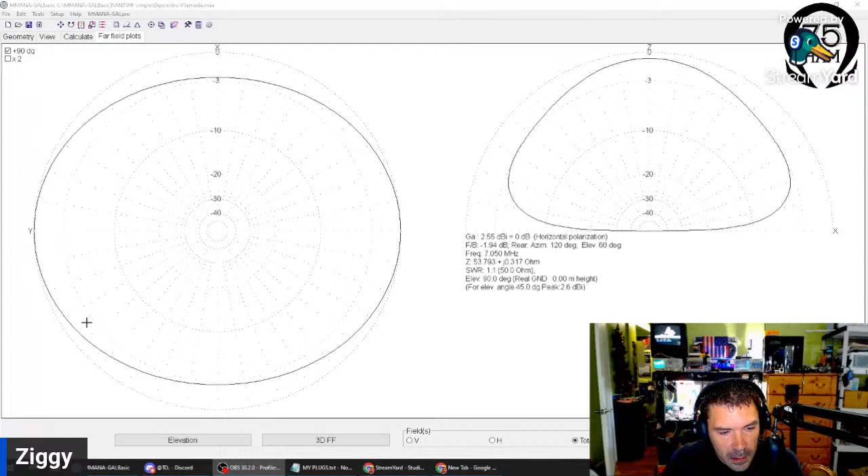So I was kind of playing around with this. I need to be able to look at you guys too. I can move this over here. Come on, give it to me. It won't let me drag it to the other window.

Good thing nobody's watching, right? StreamYard, why won't you go to the other window? That's so strange. Okay, the things I do for you guys. Beautiful. My modeling software.

Let's go new. Let's do some wire edits. Let's draw a wire, right? New wire. Actually, can't even do that. That's why. Let's go grid.

Up with the cows, milking the public. Oh, isn't that great? Hey, Hollywood, let's see.

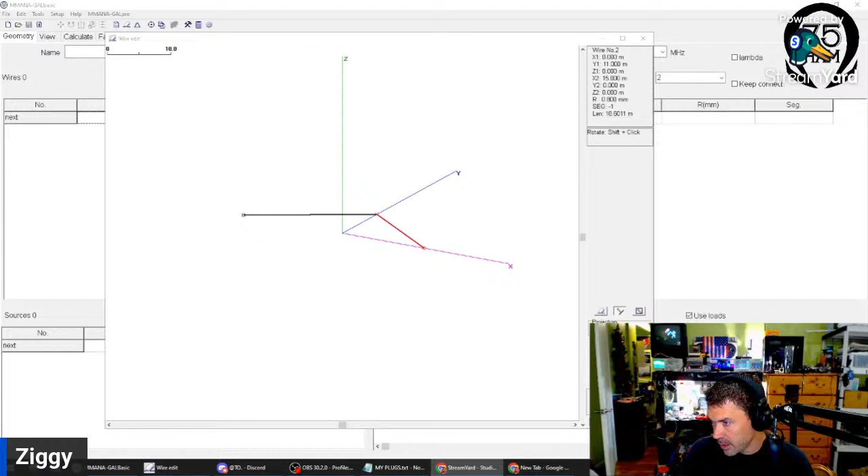Hollywood. Let's see, not able to really move this around. Shift click, rotate, shift click. Yeah, my antenna is laying on the ground, it would appear. Unless, no, Z's up.

So let's try this again. Is that not? Zero. Meters. About—hey, that looks great.

Not a problem. All right, in 3D. Son of a bitch, is it? No, okay, shift click, shift click. All right, hey, looks like an inverted V.

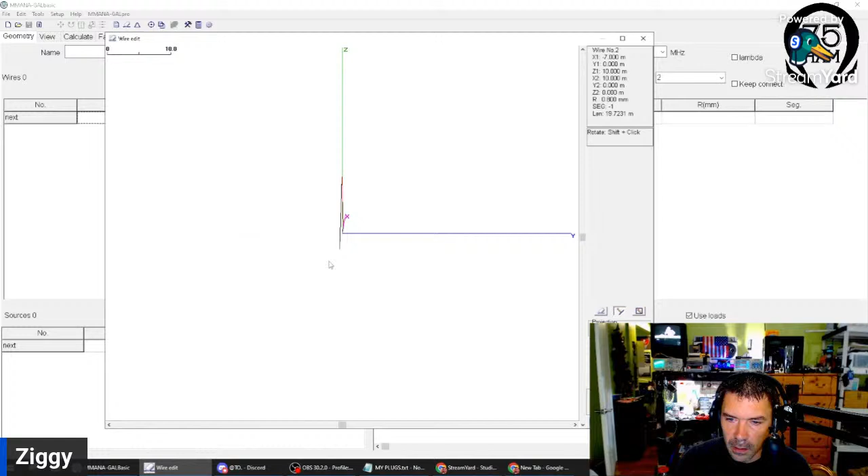Now the radials—the radials are going to be in a different plane. So this was XZ. My radial plane is going to be on the XY plane, like this.

So how do I tell it? And what were my radials? I have that written down. They were 18.5 meter... 18.5 feet, to, if it gave me millimeters I could still convert it to meters. It's 5.64. Let's go 5.64 meters.

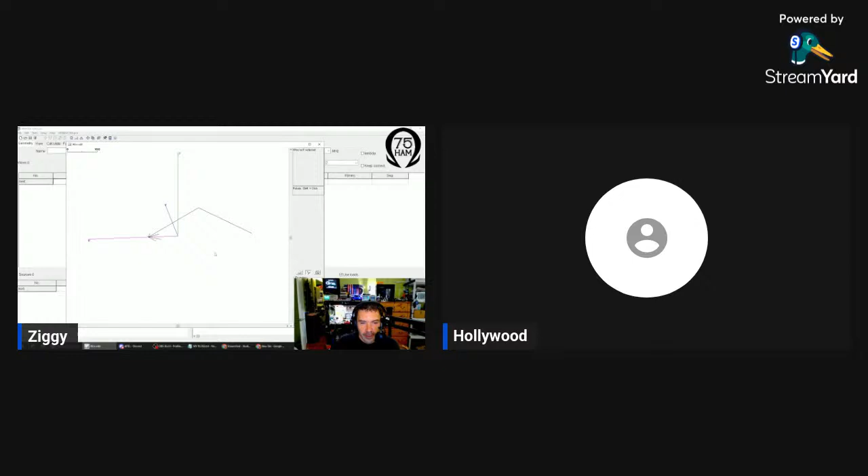There we go, and then we don't need this ugly mug in here either. Let's get rid of—well, you can't see my ugly mug, so I know it doesn't apply to me. It does not apply to you. Where is Logic Cam? There we go.

All right, and this is—no, I'm sorry, go ahead. Oh, it looks like an end-fed half wave. It does, it does. The thing about it is that somewhere around the end of this wire, the magic happens, because this is actually 2 parallel wires and one is cut 5 feet shorter than the other right here.

Oh, okay, so the drawing doesn't have the 2 in parallel yet. And no, it does not. Okay, yeah, got it.

But connected to the back of a tuner with just a little bit of radials, like this is about how it was deployed. Okay, yeah, pretty sure my modeling software is not going to let me draw a truck with a PVC mast under here for accuracy. So we've got two end-fed half waves, one a little longer than the other, right, in parallel, fed by, what, the same transformer? No transformer, right out the back of a tuner. Okay, yeah, okay.

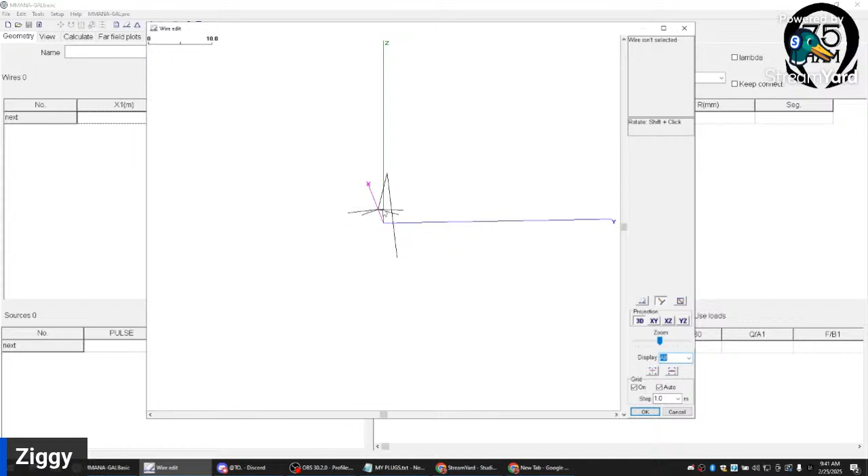So now, 2 parallel wires with spacing, obviously. I think I know why, but I'll ask for the general public: why 2 parallel wires? I wanted to give the RF a choice and something to push against, to maybe create a third realm out of the 2 different lengths, so the possibility for matching would increase by giving it just slightly different lengths on those 2 wires. It could jump between them, use them both in a favorable way.

I don't know, but I'll tell you, it's probably the easiest thing I've ever tuned in my life. It was so apparent — normally you've got to seek real hard to find it, but this thing had multiple tuning spots. Awesome. And if you didn't find one, you weren't trying. Right, right. So that's why it's got my eye. Very good idea, yeah.

So I'd love to model it. I kind of have an idea of what it's going to do, but — back in the day, let me just throw this out — Radio Shack used to sell a shortwave antenna, a dipole, and it was made from rotor cable. It was 5 wires in the flat ribbon rotor cable, so it technically was a fanned dipole.

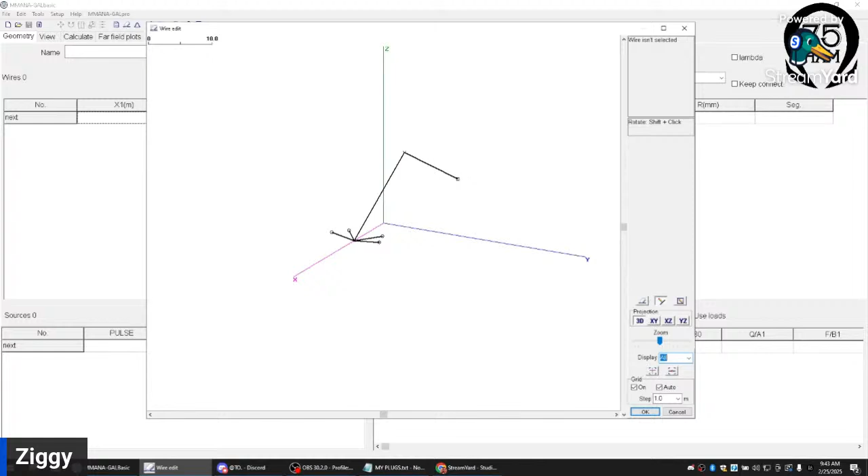So this parallel line, I'm afraid it's going to be a lot more complicated than I want it to be, because now we're talking about wire thickness and wire spacing. And I'm not quite sure that we need to do such a thing, because they are so close, they're going to have some kind of awesome coupling between them. Yes, yeah.

But I wanted to see if I was doing much of anything with the 2 different lengths running parallel as they were. But you said they didn't actually fan the ribbon cable, did they? No, oh wow, no, it was all in this — you didn't peel it apart — so they're just 5 parallel wires on either side, it's just the ribbon cable. Yeah, so yes, there is capacitance and interaction and all of that.

But electrons are lazy. That's a good one — they are, and they take it like water. Water is also equally lazy. It's a very good analogy, and it takes the easiest path always. They're always trying to go from point A to point B, and if you look at a river — look at the Grand Canyon — it will cut through rock to get to the other side, wherever it's going. And if it finds something in the way, it will bend around it. And electrons kind of do the same.

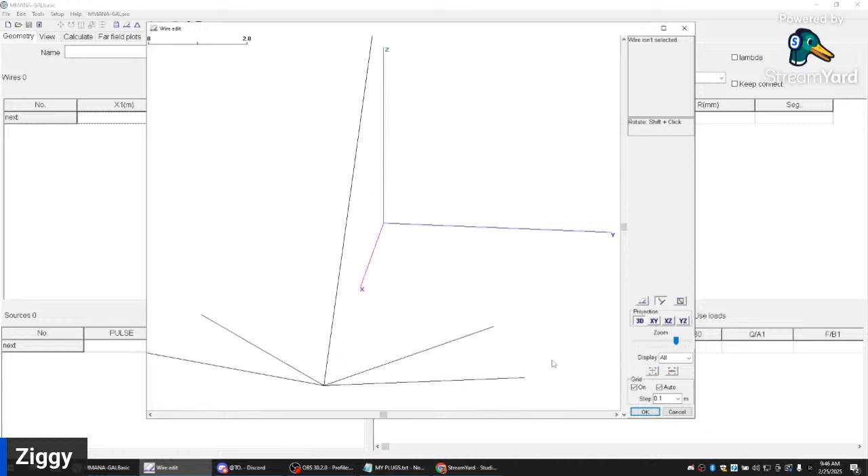They don't generally jump off the end of the wire unless you get enough of them there, and then they start pushing and shoving and calling each other names, and then they have to jump because there's no room for them. Tensions get heated — that's the spark you see at the top of the Tesla coil. Yeah, there's just no room for them, they have to leap, to their own demise. I gotta go. Yeah, yep.

So I drew all these at the same point here. I guess my MMANA-GAL thinks that I have this 5-wire device here. I want to tell my MMANA-GAL that these are not part of the initial radiating element. Did you connect?

So you want to make sure you put your feed point on this wire solely. Yes, right. Got it. Whatever number that is. So feed is somewhere else. Where?

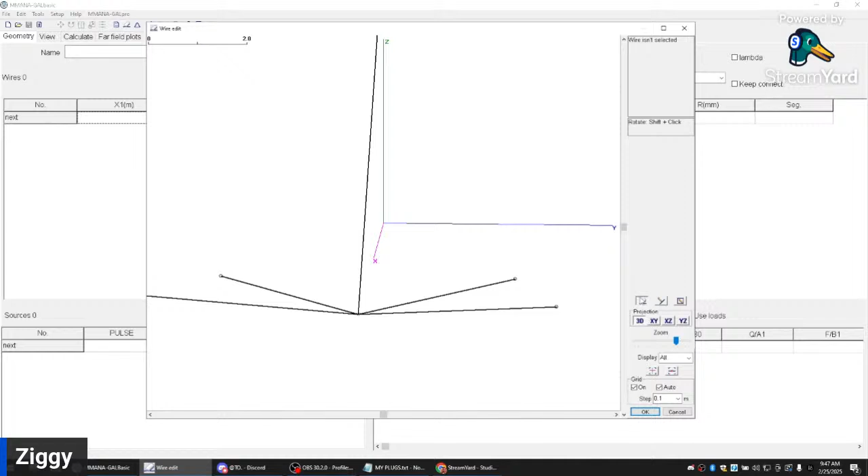I am in wire edit. I should be able to not erase. How do I select? Above 3D, click on the icon right there. Yep, that will select it. And now take the mouse and click on that wire. There he is. Right, so that's wire number 2.

And depending on which direction you drew it, one end is the beginning and the other end is the end. We're looking at the beginning. So when you're done editing the wire, you go to the geometry tab in the upper left and select wire number 2 beginning.

So in the bottom left here under sources. Nope, bottom left. Yeah, the pulse. Click in the pulse. It's going to be W for wire, 2, B for beginning, and then hit the enter key.

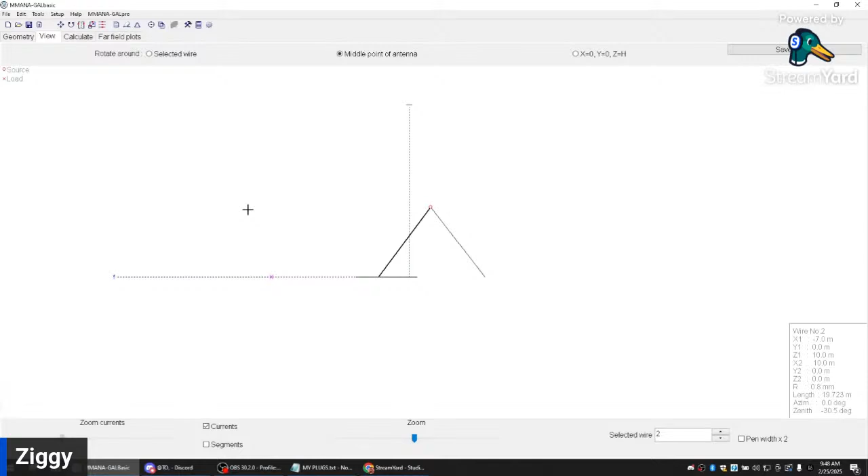And now go back to view, and you should have a red circle there. Oh no, zoom in, my red circle went to... So you drew actually 2 wires. Okay, so that's okay, so that will be wire 2 end, that is the correct position.

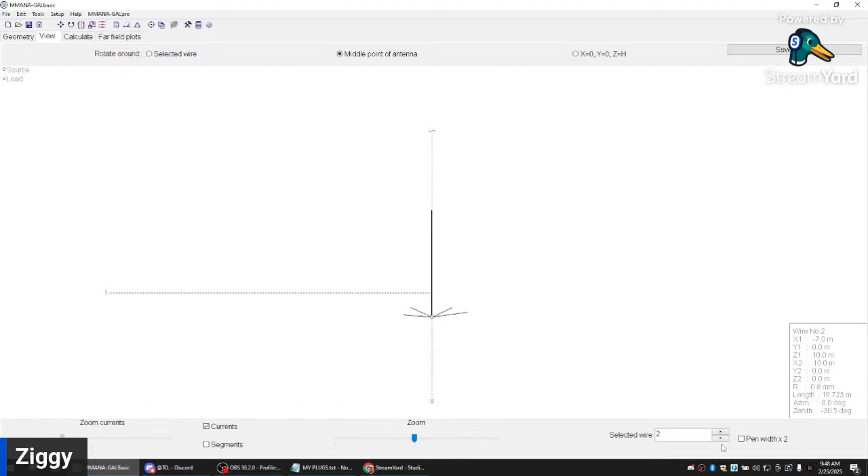There it is. Perfect. It's often very difficult for people when we start out to see it in 3D in their mind and then know where the points are. It's kind of clunky, but once you get the hang of it, it does make sense.

So these 4 little wires that I drew here for my quote radial field, are they assumed to be on the other side of the feed? Yeah, the other side of the feed. Because what happens is on this software, the red dot is sort of like a balanced input. It doesn't differentiate between which side is hot and which side is cold.

It's probably a good idea to not think of it that way, even if you're feeding an antenna with coax, because both sides actually do move. Just a slight click less than the other. It doesn't move at the transmitter end, but it does move at the far end. That's a big concept to ingest when you're a young ham too, and it's 10 o'clock in the morning and people are going, what? Oh boy, he's starting already on us.

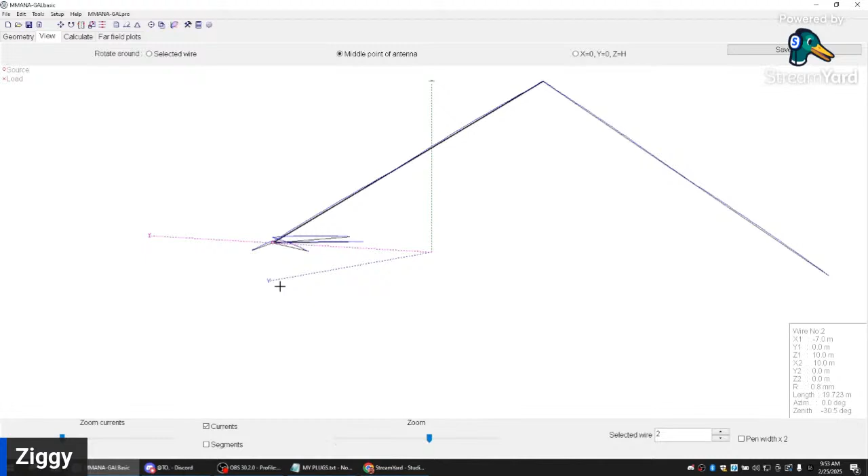It's hard to get a view of the currents. Go on the bottom left where it says zoom currents, slide that thing over to the right. Oh, you can make them exponential. Oh, how wonderful, there you go. I've always wanted to know how to take it from... come on, turn it up. Where do you get my bill? By the minute, I'm sure.

Okay, so those radials are doing some work, let me tell you. Which is fine, because this scenario is we are sitting on a table out in some grass with a battery, our radio, and a tuner. So we are kind of free to experiment with radiating radials, in my opinion, as long as we're not bonded to Earth or anything.

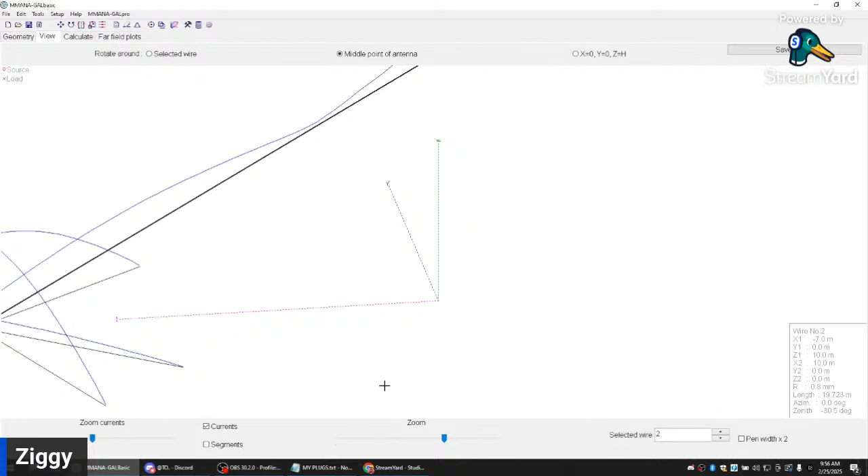Right there is a high point, and then not quite a half wave at the feed point. So it's got current at the feed point, it's not going to be a high voltage point. Remember Ohm's law: if it's high voltage, it's high impedance. So this is not a high impedance feed where we are right now. So if I made the wire a little bit longer, then I would put the voltage at that red dot. If I made it a little shorter, I would have more current at the red dot -- a lower impedance antenna. So I can change the resistance value, the Z, of the antenna by making it shorter or longer.

Right. But you always start from the far end. I think that's what I'm trying to say -- it's morning and my brain's not working right. But that's basically what I'm trying to say: work from the far end to you, because the far end never changes.

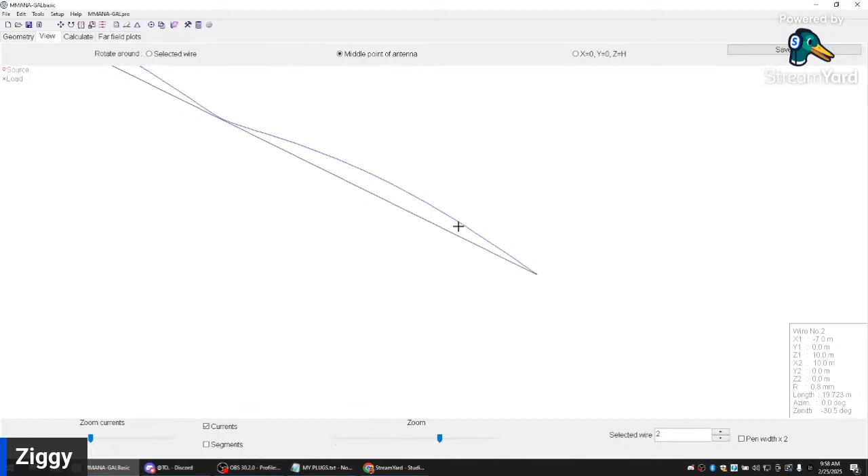Now, there's going to be skeptics, and they're going to say, well yeah, but what if the wire is stuck in a tree? It'll change. What if the tree is wet? What if it's raining out? What if there's snow on the wire? But in real simple terms, because we're starting out, the far end is always high voltage, no current, and measure back to you from there. It'll help you conceptualize what's going on. And this is a great picture when you look at the currents -- this says everything that you need to know.

Like I can see that your radials are a quarter wave, or close to it. They're set up correctly, you're absolutely spot on.

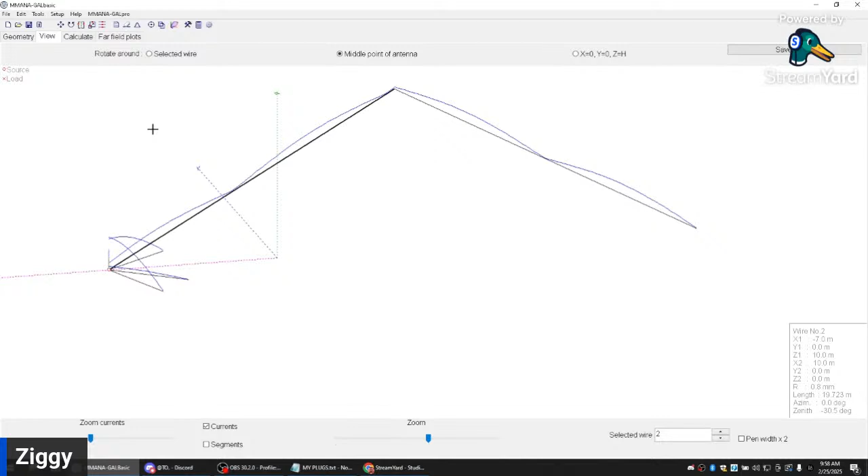This is why I'm so interested by this thing, because there was not a single measurement done here. This was all what I had. I don't even think I cut anything, I just had this stuff and made a radial field with 4 equal lengths. They are 18.5 feet long each, and when I deploy them, they are completely insulated from the ground.

That's something I've recently learned to never do again, is give my RF a path to sink into ground. That's a whole topic by itself. So they're completely floating, and then my radio, my transmitter, and most importantly my tuner are all left afloat. I have no ground into the earth, bonding my tuner into earth or anything. So this is a completely floating setup, in my opinion a perfect portable setup.

And the tuner is doing all of the work. This is in no way supposed to be a resonant antenna.

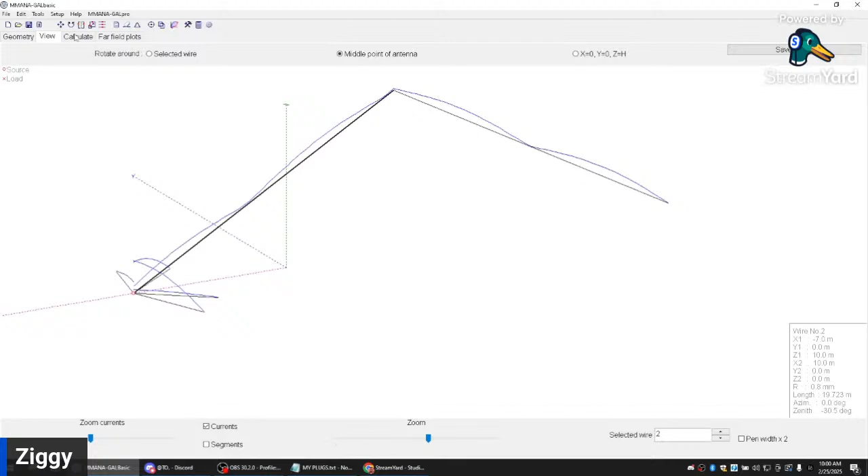This is a long antenna, 60 feet, oh yeah, what I've got right now. Oh, it's longer than that. Oh yeah, we were supposed to fix this. You okay? Now you're showing it at 80 meters. I didn't see what frequency you were on before. I was on whatever was there by default. I believe it was 14.1, you were on 20. Yeah.

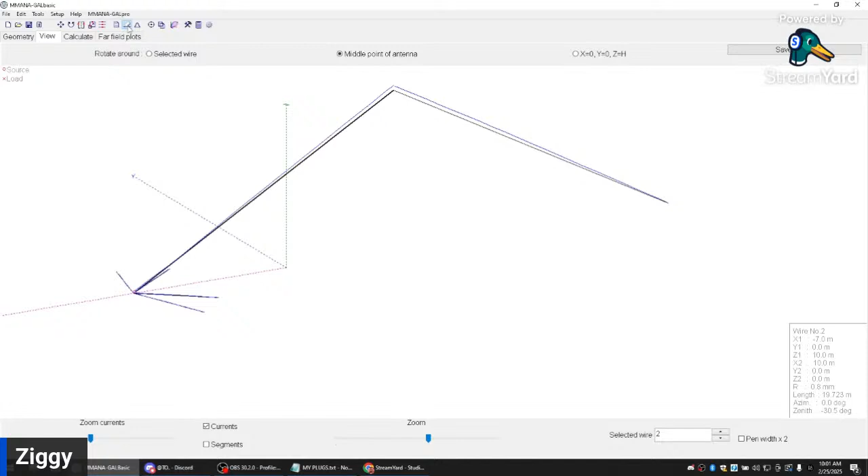Anyway, I need to fix this thing. Can I just edit it here? They will not be connected if I edit it here, they will separate. Yeah, that's a tough way to do it, you can do it that way. Let's do it the smart way, let's delete and redraw. Work smarter, not harder. What do you want to do, shorten the wire, start over completely? What do you want to do?

I think the radials need to be modified because they're showing 5 meters, they're actually 5.6 meters. Okay, you can just stretch them. Just click on it and pull it to the right.

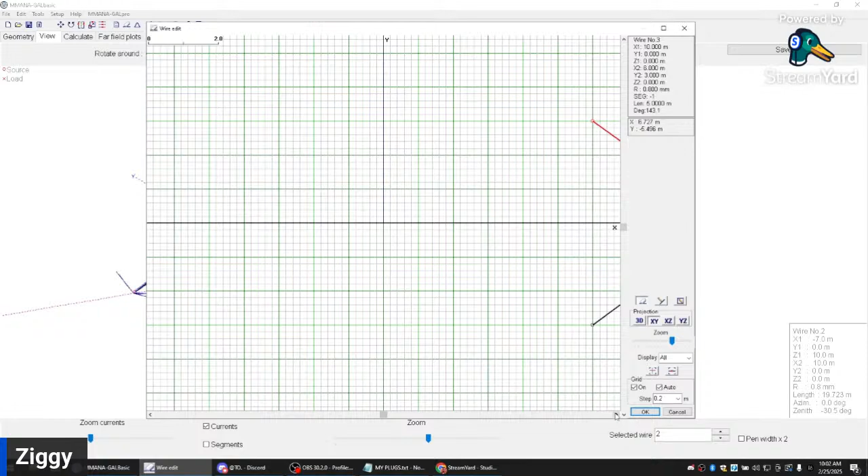Let me zoom out, one of those views will show you. Yeah, so it kept snapping me, because it snaps to the nearest green line. So if you zoom in tighter, it'll give you more precision, it's too coarse is what it is. And you can move the image. If you go down to the bottom, you can slide the whole image to the left by moving that square at the very bottom to the right.

Oh okay, now it's letting me do my own thing here. So the length is 5.6. Sure, come on, oh, to each square, that's where it's snapping. Yeah, that's correct, the junction of each green line. Let's just get it close because this is in no way an exact science. That's right, 5.6, give me this.

Now the bad news is, I have to be somewhere in an hour, and I'm far from ready. Well, you're going to have to get ready. I'm going to be in and out.

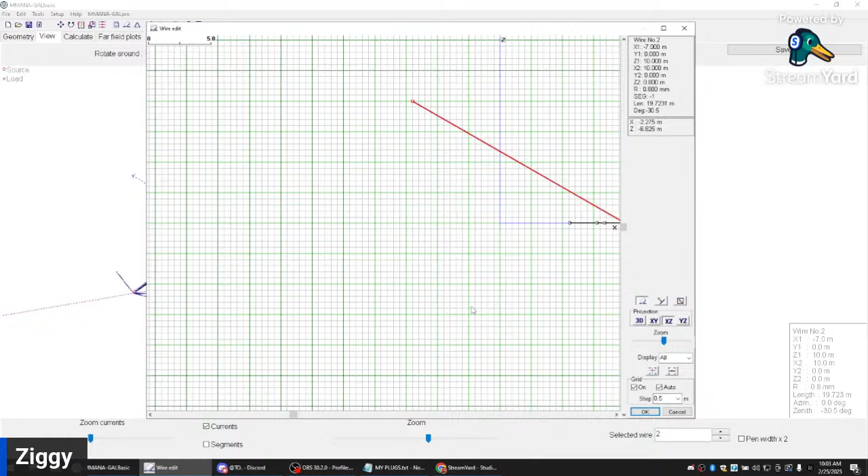So what I'm going to do is mute the mic and come back, and if you're still on I'll check in, turn up the mic gain and say hello, see what you're doing. But you're off to a good start. All right, I will keep the momentum. Magnificent, yeah, and I think we're going to chuck this wire and redraw this one, or change its length. Yeah. Cool. All right, Hollywood, thanks for letting me jump in. No, thanks for showing up, it's all fun, I'll be here struggling when you need me.

Okay, all right brother, I'll check in a little bit. Okay, all right man, bye. Adios, see ya.

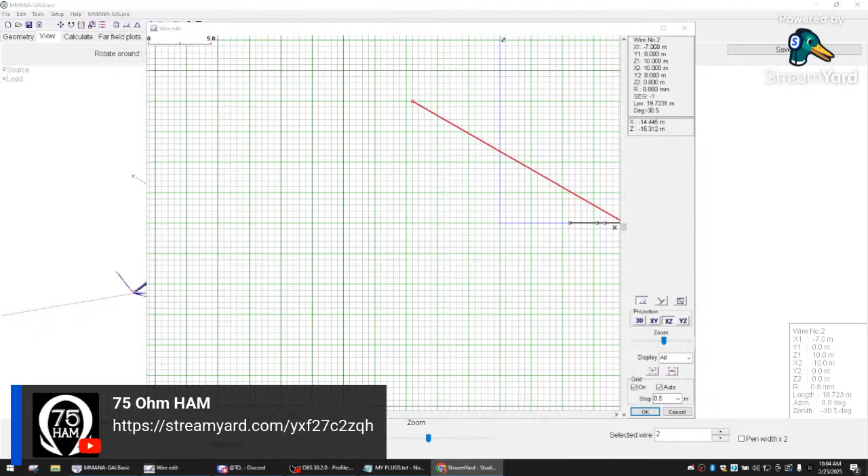Let's see, let's go back to you guys. All right, perfect. Hey Paul, hey guys. Why don't you guys jump in here if you're not doing anything? Let's see, I'll repost this link for you guys. I gotta find it.

Oh, and there's Josh, hey good morning Josh. Ziggy, let's do a video of you teaching me how to use this program sometime. Oh, teaching you, we can play with it together, I'm good at messing it up and modifying stuff.

Let's see, what was I doing? I gotta pick up the kids today, it's early release day.

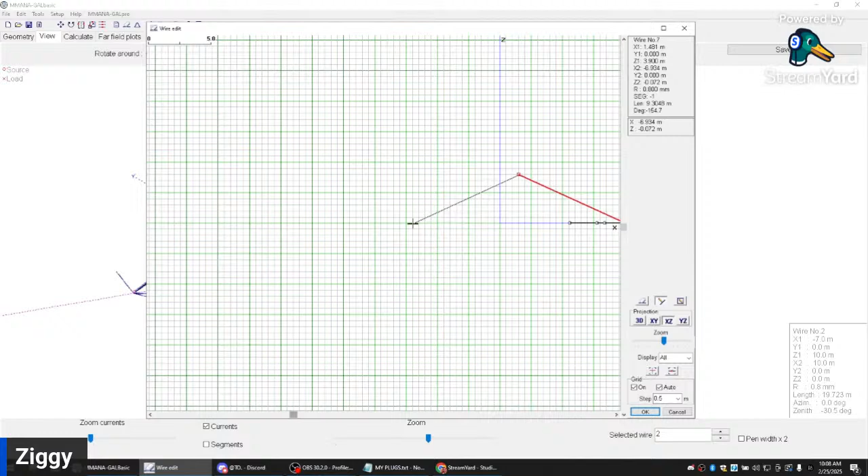Let's see, all right, so that was the first wire. We are going to draw another wire, and it's going to be, what was it? 9.3 meters, right? 9.3 meters. Boop, yeah, I dig it. All right, let's do that.

Oh, that's a much better representation.

Oh, okay, I just soldered 2 of the KB4PHC kits together. But did they work? That's right, I remember hearing that you had a couple of these kits. Only flashed one, but it works. Hey, success.

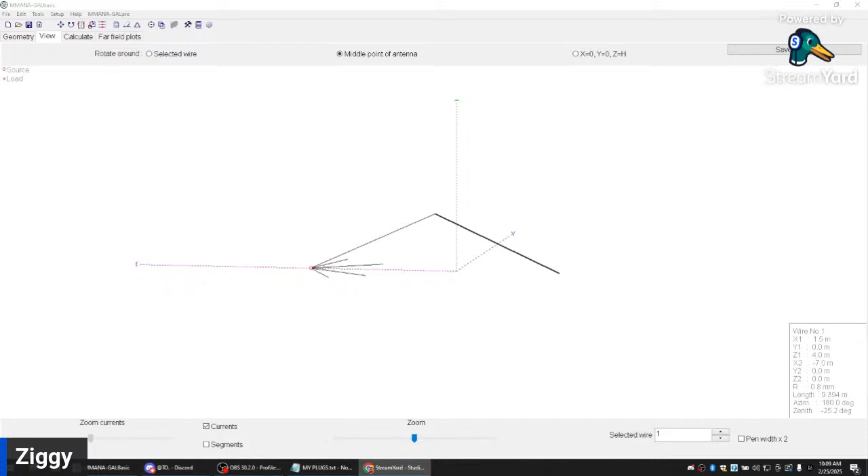Let's run this, we're at 14.1, we're a meter off the ground. Run it, that didn't take long at all. Far field, whoa, look at this thing! What on earth? What a monster, okay, I need to see where the hell is.

Okay, so here's the radio side.

John says he's got to worry. Sorry, man. Well, don't worry too hard.

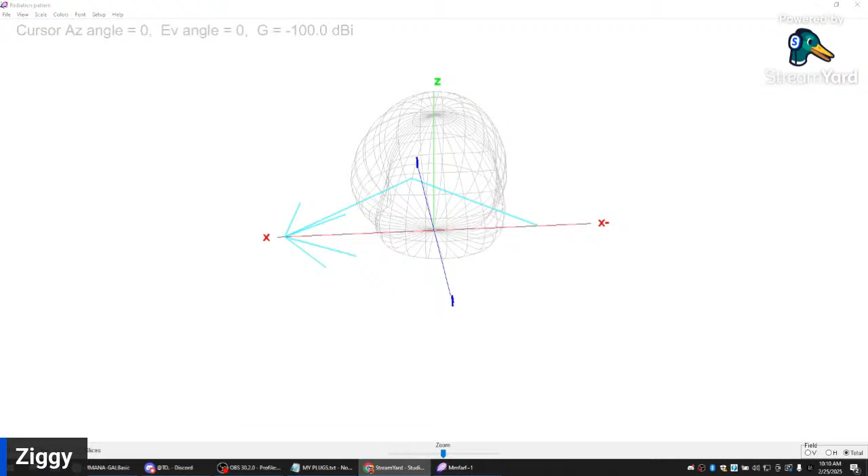Do you want to go outside, Daisy Doo? Come here Daisy, Daisy, show everybody you gotta go potty. Come here, come on. Look at this face, oh it's your daisies. Says I gotta pee, come on, I'll take you out, come on. You gotta get off Daisy. God. Excuse me guys, let me take care of my dog, I'll be like 30 seconds. Come on, let's go.

Now I gotta reset. Let's see, shit happens better when it's outside.

All right, so let's go back to this. And I want to see you guys at the same time. There you are. So here is the radio, right?

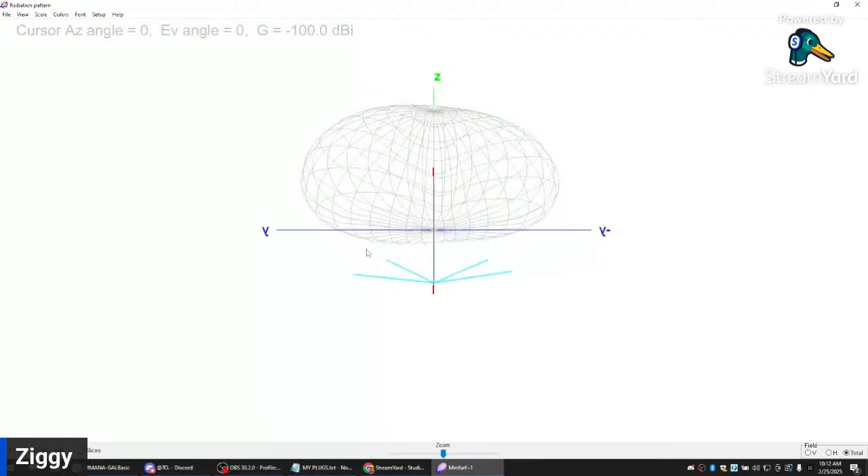This view doesn't show me currents, but it does tell us that the broadside of the radiation pattern, that's interesting. It's not symmetrical. I would imagine it would want to be symmetrical, but that's not how RF works. I bet you there's some kind of discrepancy in this not being symmetrical which is making it do that, which is fine, this is not gonna totally rock my world here. It's pretty high. For 20 meters, that's not really a terrible thing.

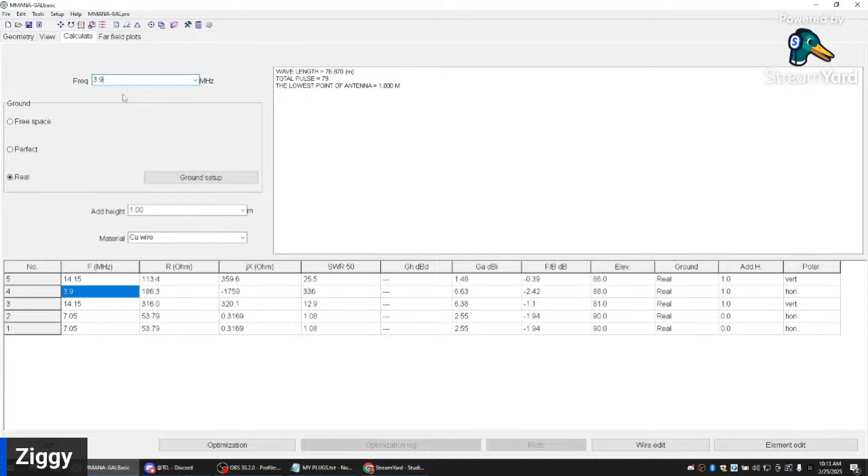Let's change the frequency. Let's go to what I'm most curious about, is why the hell this thing worked on 80 meters the way that it did. Oh, tell me the SWRs. What is it, what is it? 25? I can deal with 25 SWR. Oh, well, I know why it was so good at 80 meters. My word.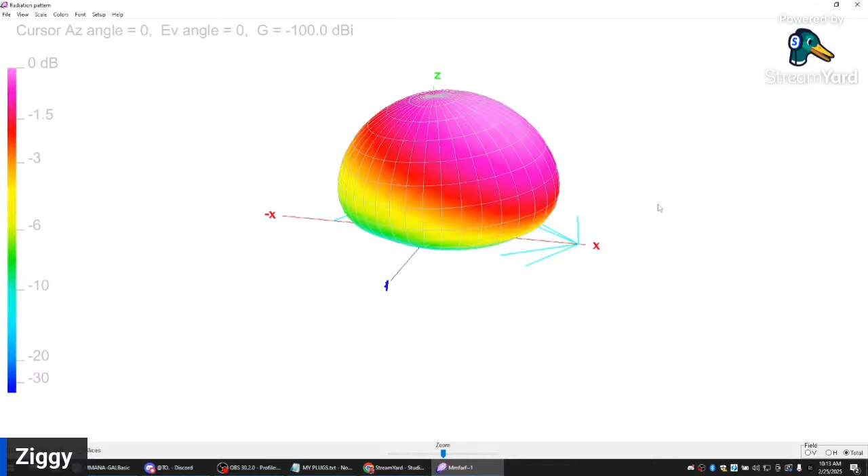Do it. Oh cool, okay, so contrary to what I thought was going to happen. No, and that's the crazy thing, isn't it Hacks? It's actually really amazing for something this low. And why the hell it, I mean this is exactly what you want for 80 meters. Plus you have the directionality kind of towards you, which is great because that means that you don't have to continuously be running to the end of your wire trying to point it where it goes. It's bubblicious towards the user. So it's just kind of like, throw the wire out that way, make your radial field, sit your butt down, and make sure who you're talking to is behind you.

Let's see some... man, that is so great. Ogling at my own design here.

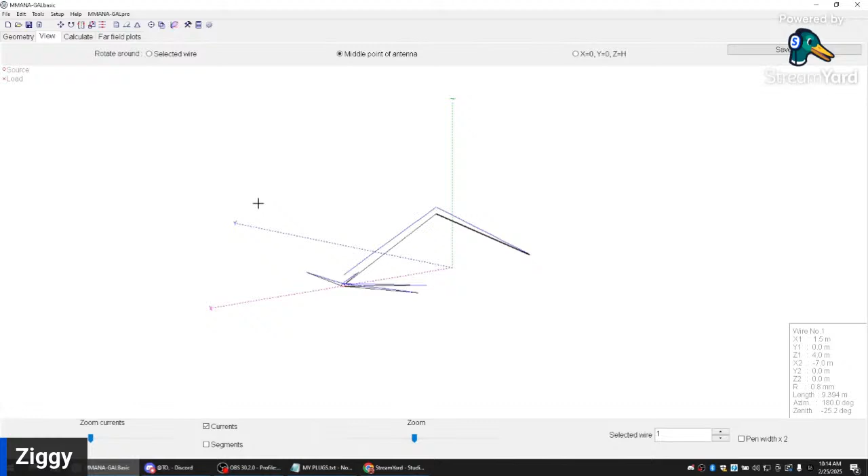Where's all the current at? Well, would you look at that? Now I see why it works so damn well.

It's kind of a quarter wave. It wants to be a quarter wave, right? What was the total length of this thing? 60 feet.

Yeah, which is a multiple. Okay, now, okay. Huh, isn't that interesting? What about for 40?

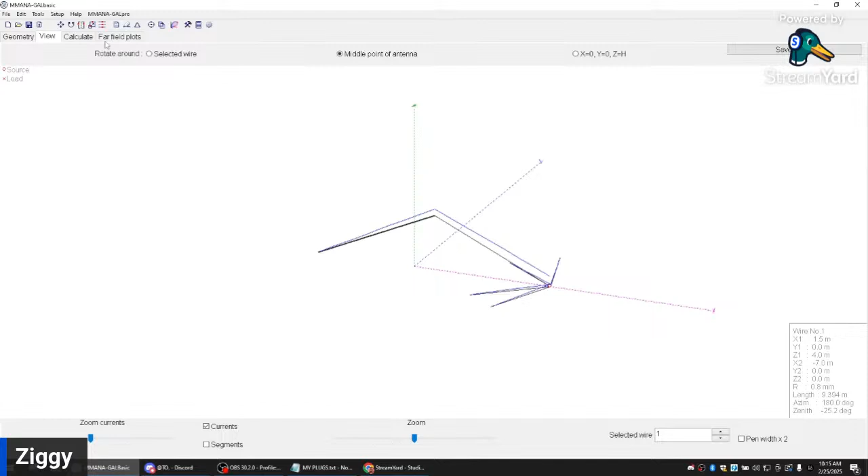Not a DX queen. Still a very NVIS device, even on 40.

Show me the... oops, I don't know what that was. Oh, that was just splicing. Again, similar.

28. Show me something weird. Everything looks too pretty.

It's that manual tuner action. Yeah, do it. So here's 10 meters, guys.

It looks like a Pokemon. All right, so we do get some

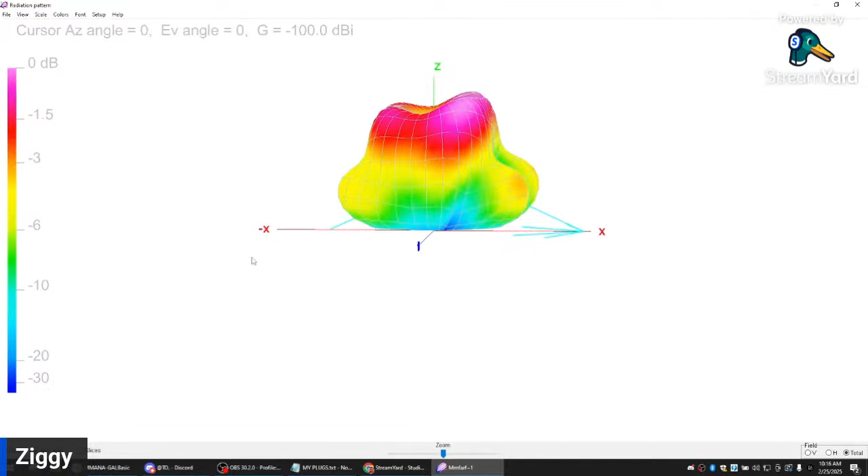bulbous again towards the user, towards the radial field. It's like they want to reach towards the radial field.

Now, this is all fun and everything, but this is only one wire, and this is not what the ZigZag really is. The ZigZag has two radiating elements.

I wonder if I can draw a small stub out and then go parallel. This is going to be hard.

They did not make it easy to... let's see. I think what I need to do is go to the two parallel elements.

If I just draw another wire next to it and tell it that it's feeding that wire too, is it going to yell at me? It shouldn't. Huh.

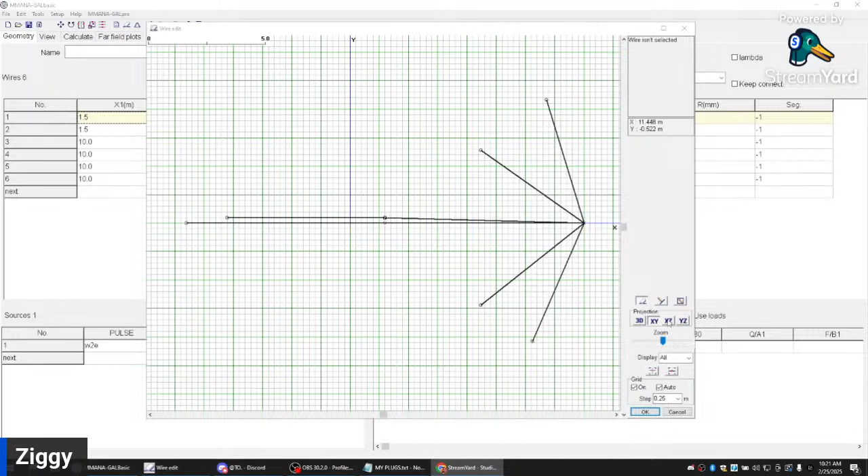3D. Perfect. Wait a minute. Damn it. My wire fell on the ground.

Okay, let's pick you up. Let's move you. Not quite sure how you did that. I have to select you. Let's move you to here.

We're getting closer. And they both want to fall to ground now, so I need to actually... Can I move you? Oh, look at that. No, well, it just pretends like I'm moving it. Oh, it connected them. Don't do that.

Shit. No. Okay. What the hell happened? That was cute, right?

Oh, now they're bonded. Son of a bitch. I've messed my length up and everything.

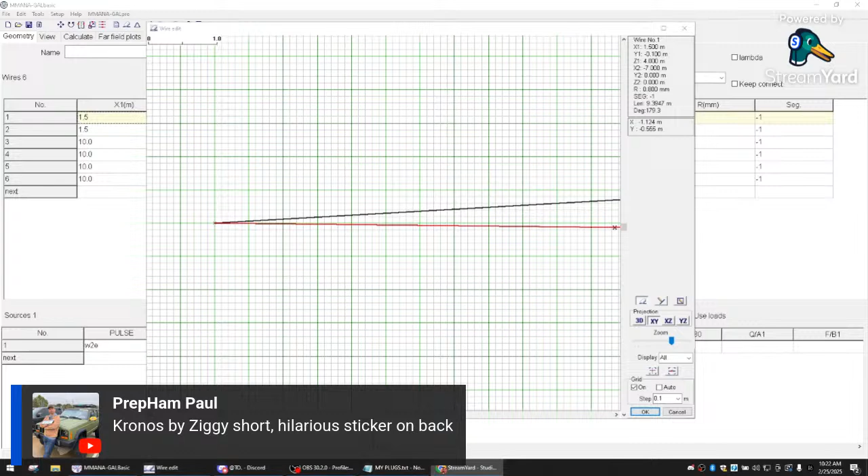Sticker on the back. Yeah, I made that last year. That's the joke.

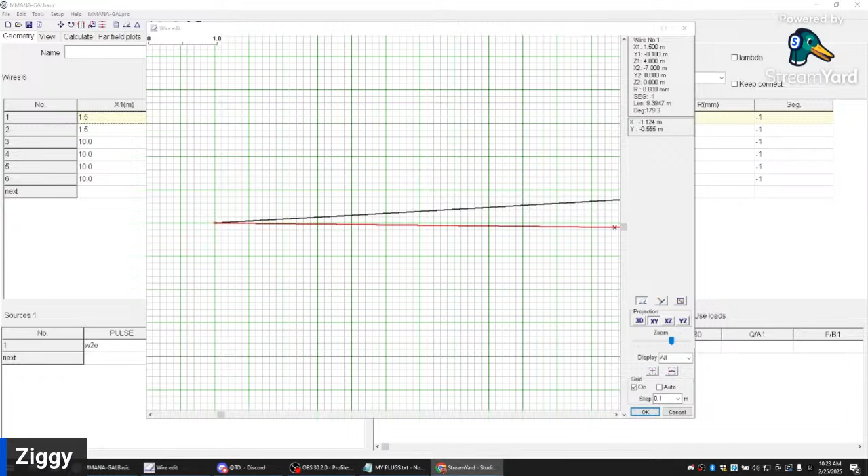Even the digital wires don't want to stay up. That's pretty good, man. Oh, I've broken it. I'm all zoomed all wonky. How did they get attached?

I can't believe Control Z does not work in here. Edit.

Oh my, boy did I just lose everything or what? Oh, I killed the window and didn't press OK, so it just delete-redoed everything.

That probably means these aren't right anymore. No, these are all about right. Anyway, let's not mess with that. Let's go to this. I don't even know what view that is.

Draw wire. From here to here, and then from here to here, we're going to draw a wire to get our 5 feet. That is 1 meter.

Point. Oh hold on, control. There is no Control Z. Why? What if? Give me this. Oh, you can't. I gotta edit. There we go.

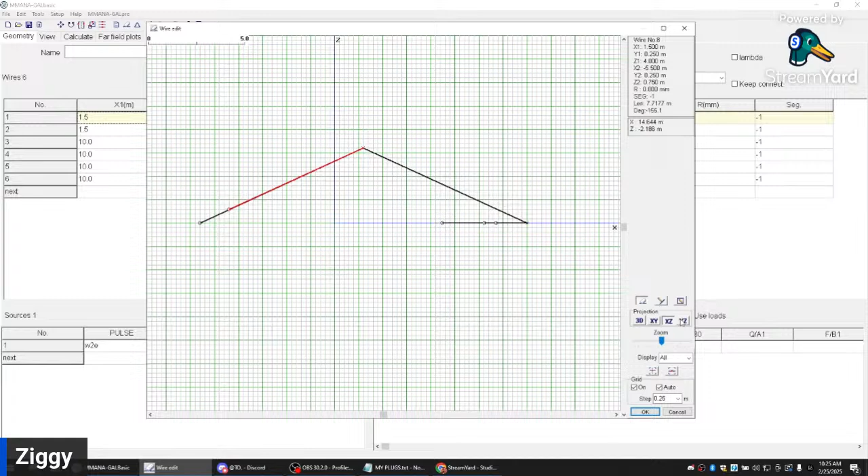Nope, you - let's put you in line, son. Yes, I don't know what that spacing is, but now we're getting somewhere. All right, so now I have two.

Oh, I need to tell it. I don't know, what wire is this? This wire I just drew is wire number 7. Okay, let's just say okay for now.

Wire 7 end? I don't know, let's see. Nope, not the end of 7. We need the beginning of 7.

I have to pick up the kids at 12. Don't let me forget, guys, because I will forget.

All right, so I got 2 wires being fed at the beginning. You guys ready to see this? I am too.

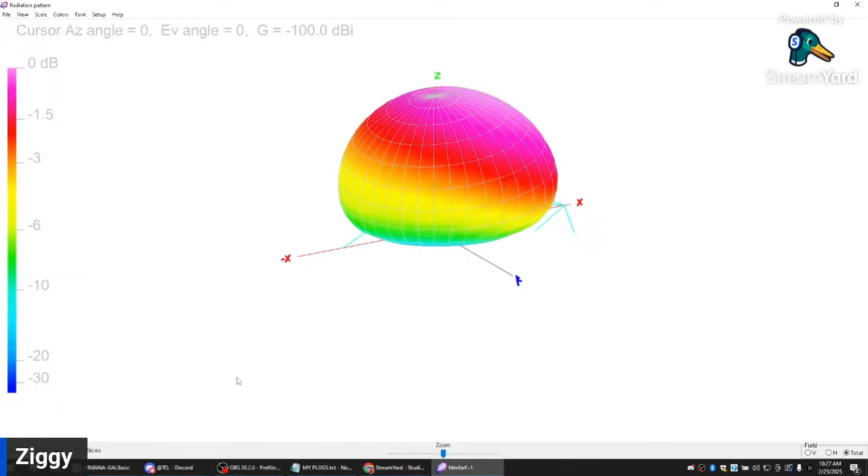Okay, let's go straight to the meat and potatoes. No fatal errors. Oh! All right, so pretty much the same thing. Yeah, go ahead, do your thing. Yeah, pretty much the exact same thing as before.

Very NVIS. Let's go back to 3.9. Let's go to - I don't want 40 meters, 20 meters. Let's go 14.2. 14.2, run. Start.

Good, very, very bubblish. So this is kind of great for the tactical ham, right? This is fast deploy, no transformer, multi-banded, tunable as all hell.

Okay, I have questions. I have current going to the sky. What in the hell have I done here? However, I do have both elements radiating. I see it, I see it. And just like Hollywood said, both are high voltage, low current.

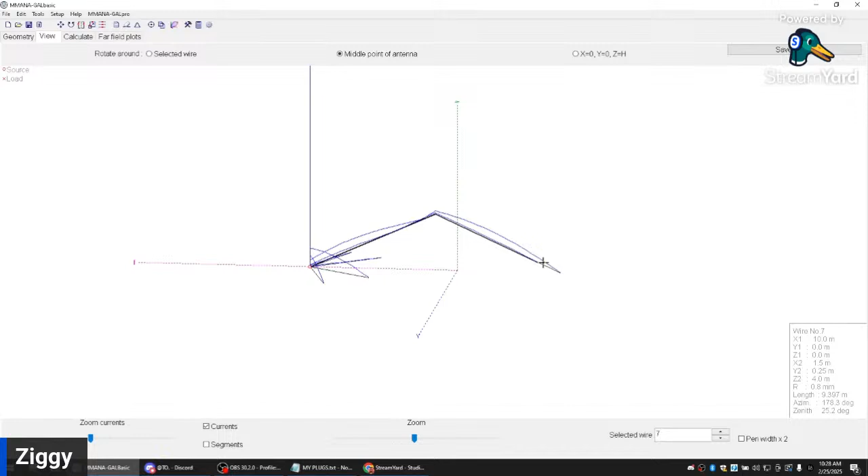Yeah, and it would be cool if I could use my third mouse wheel to be interactive with this, and scroll wheel for zoom would have been a real handy thing too, guys.

So we actually have - see, I knew it - it's picking its path. They both fall to 0. However...

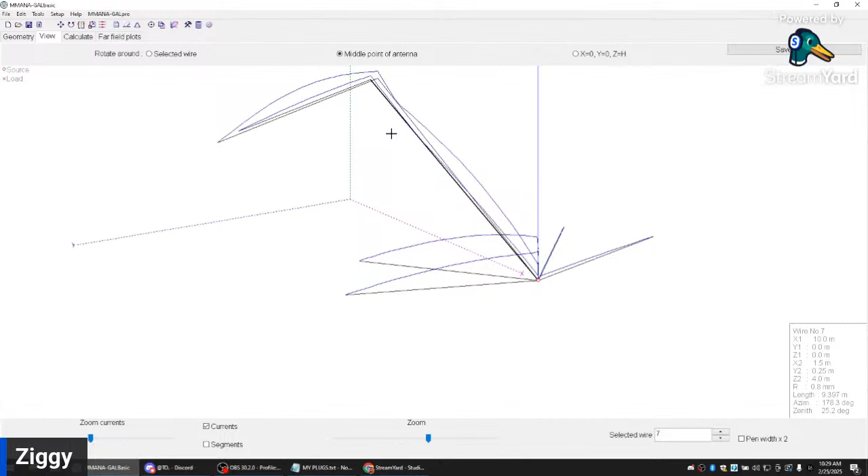Just like Callum said, they're all gonna wiggle. Looks like we have some pretty abrupt - I see what it's done. It's made some super epic high current push-off point, and it's just kind of done this against the 2 different radiating elements, and it's really pissing off these 2, which is fun. And that's how we get that non-symmetrical radiation pattern.

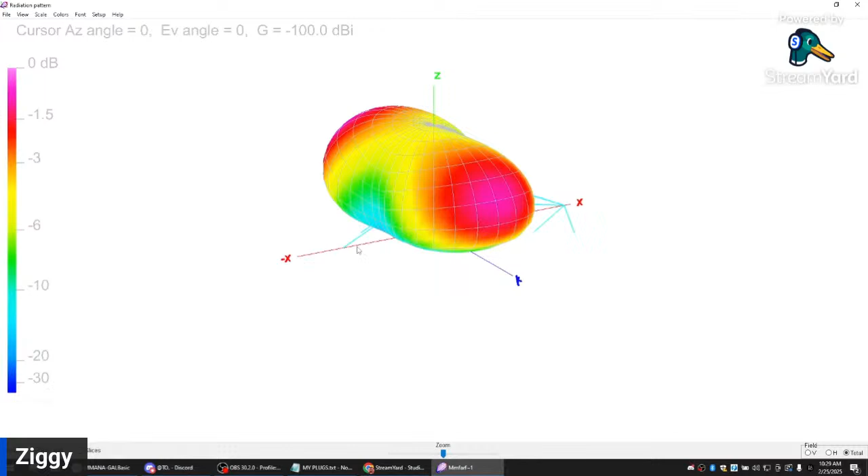Yeah, so that always explains it. Now, so this is interesting, right? Whereas before on 40 meters we had a kind of lefty bubble, and on 20 meters we have a very, very right bubble. But either way, you're getting out either way broadside on this thing.

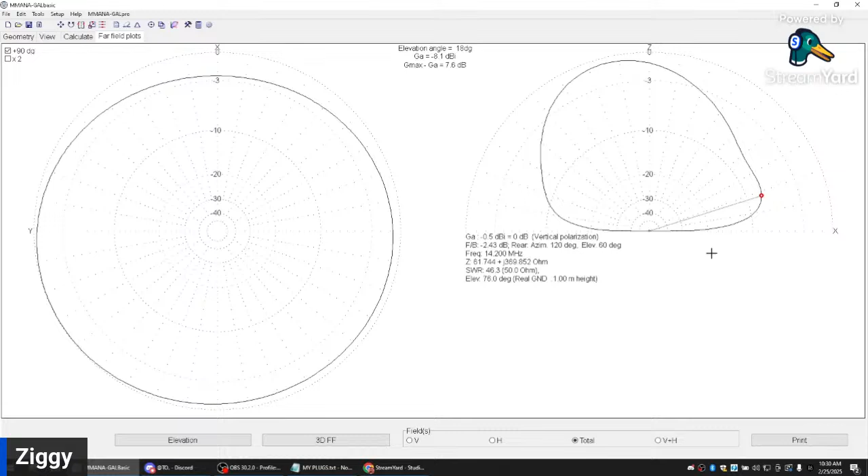So, I'd say one of your highest points would be there. Negative 8.1. Yeah.

If I didn't say it already, good morning, Grouch. Paul's got a plane to catch.

All right, so this is good. I've got a nice little starting representation of what the hell this thing is. This is excellent, I am stoked. Give me this shift move. There we go.

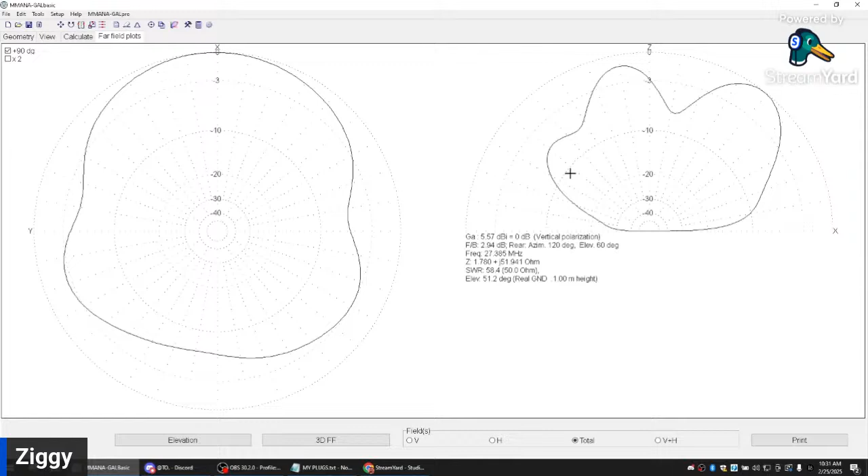What's another band we all play on? Let's see. Yeah, that's pretty typical, pretty much like 11 meters. It's all bunched up. Now those two high lobes are at the end.

Yeah, because it's folding so many times onto the wire. Let's see, yeah exactly, holy current Batman. My God, that's not terribly a bad thing. Oh man, the radials are doing a lot of work too. That's great, this is great.

It's given the RF multiple paths to figure it out. It's including all of the radials. It's using all of the antenna. There's so much RF getting out of this thing.

Also, I have a lossless transformer because I don't have one. I have a manual tuner out in the field. Let's see.

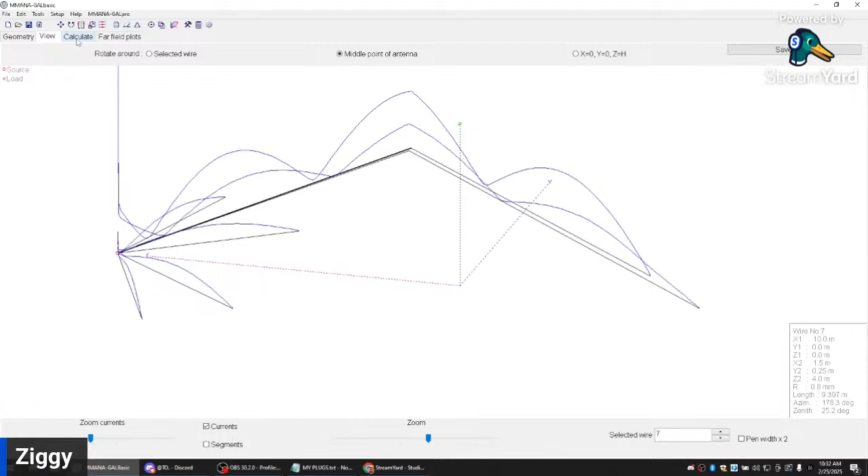No, I just pissed off some people doing that. Let's - 28.5. Start.

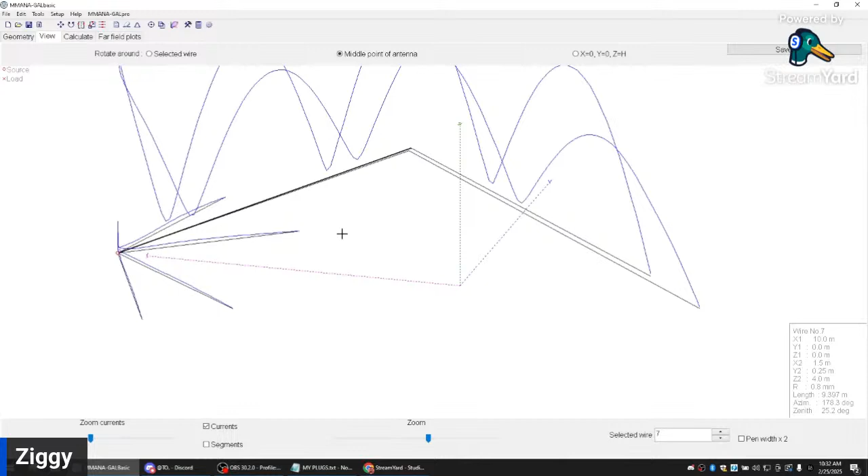Ooh, that took a while. Yeah, drastically different. Whoa. The radials are not very involved on 10 meters.

My God, it's almost as if it's resonant. What is going on here? No, my SWR's are in the 155s. jX ohms at 8.

That's a degree. Gain in dBi is 6.62. That's pretty respectable.

So again, we have two major lobes still pointing at the user with the radials. So the next question is, do more radials help or hurt? And the length of those radials, do they help or hurt?

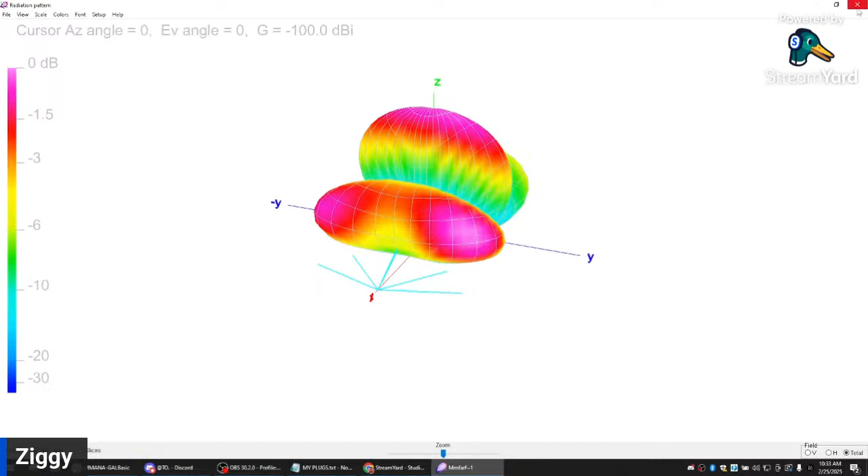I wonder. It's really not a bad setup for 80 and 40 like we've done already. Wish I could rerun that. There it is, fill matrix. So what was this? That was 20. I don't know why I did 28, I thought it would do 7. No, it's just doing 28 every time. 7.1.

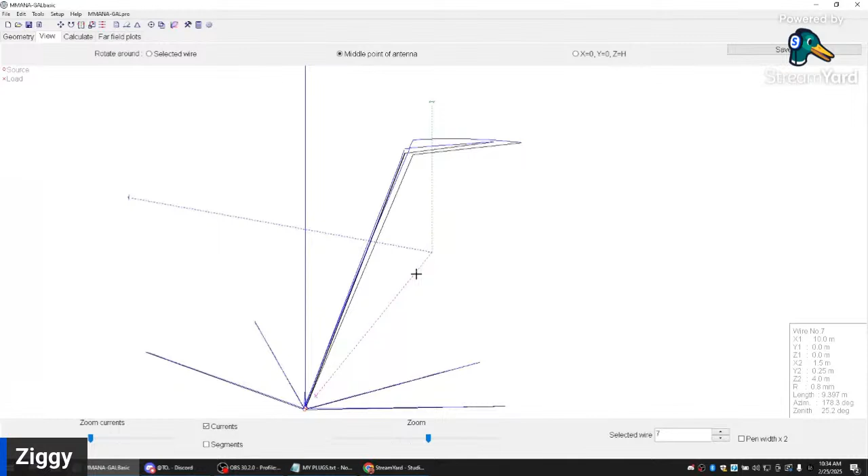How does a cap hat make it symmetrical? Cap hat? Where's the cap hat? So I'm hurting with this question, Hex. Help me out where the capacity hat is. Does a cap hat make it symmetrical?

I don't know, basically a second radial system at the far end. Ah! Let's do it, okay.

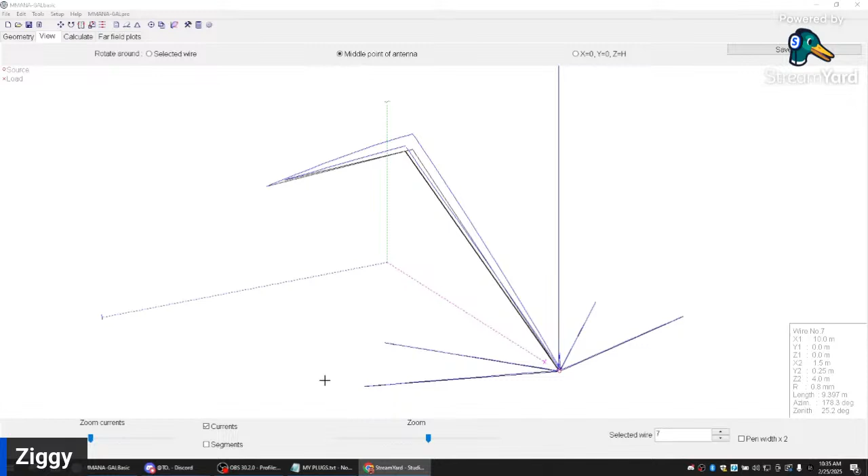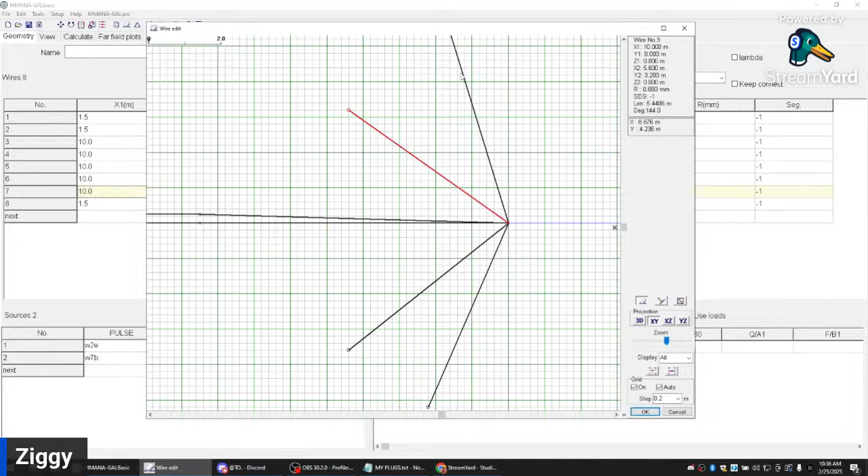So if we did one radial system 5 feet longer than the other, and this was not electrically connected, right? So if these are, what's the length, 5, 4, then we would want. Let's just go 6.5. Let's draw some wires, 6.5. Go up a little bit. Let's go. Six and a half, 6, 6.

Oh, delete that. Shit, wrong button. Nudge, I need my nudge button. That's close enough, 6, 4. And we'll draw another one. 6, 4. Six, 4. 6, 4. Yeah, why not, 6, 5.

3D. Uh-oh, wait a minute. Zoom out. Yeah, we're fine. Probably could have put them a little bit more under it. That's okay.

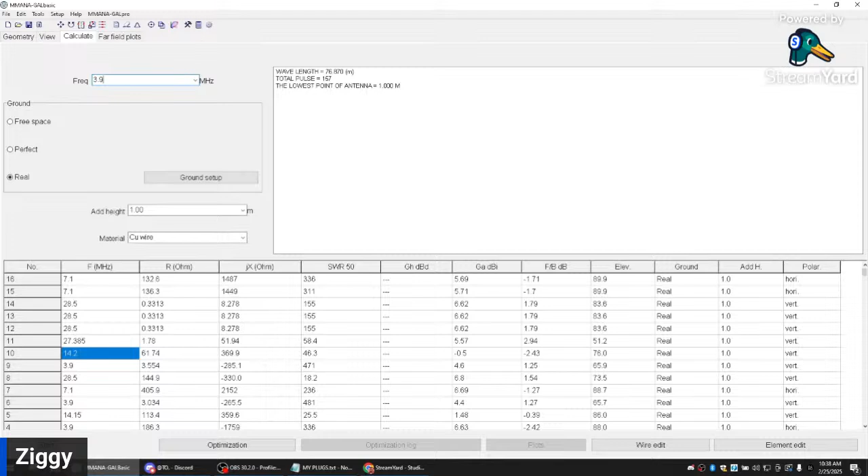Do a thing on 40 meters, do it. Yeah, nothing really changes, not on 40. 40 was a pretty behaved kind of situation. Still behaving, wow, okay. Doesn't go back to the currents. Hasn't changed much of anything. Nope.

All right, so the radials are doing... He says the capacitive hats go on the other end of the antenna. They do, I agree.

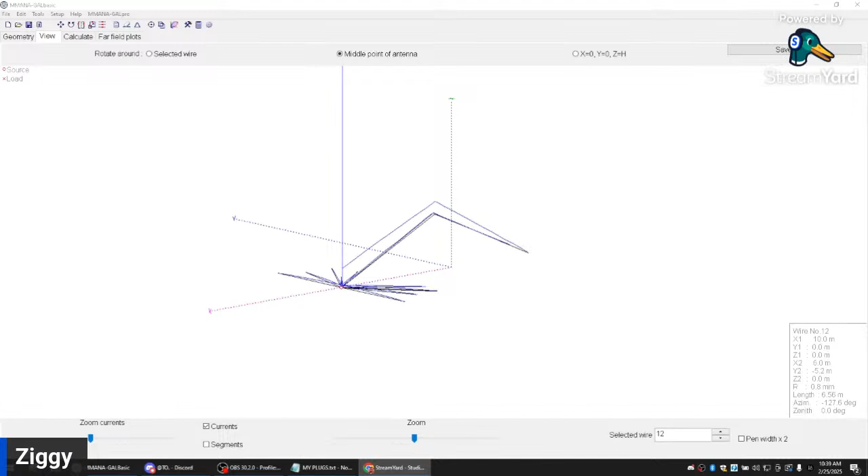I was trying to figure out if you see. This is the worst thing about this. Hex, was it you said that you had to worry? Or was it John? Somebody had to worry. Hex, homie, if you're free, come help me out. This one's for you, homie.

So at 3.9, I remember before my radials were doing a lot of work, they're not doing so much, they're not doing as much work. Getting a lot more current onto the antenna with those multi-length radials. Actually, those radials are doing some work. Wow, look at that current, my God.

So that was... What's it going to do on the digital portion? Nothing's going to change. Not that we're going to see. 21.

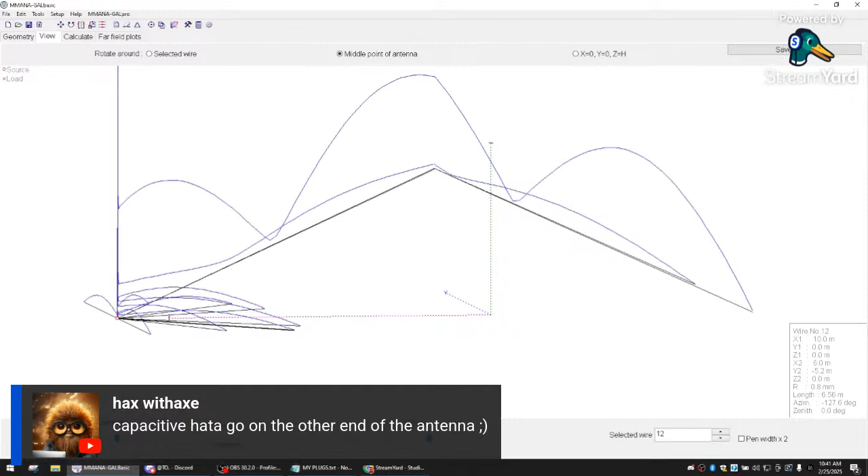Very indecisive, I got remarkably bad stage fright. Well, then just join in an audio. You don't need to see me. Just come Hollywood on me and just be my voice in the sky. Ooh, I love it, I love it so much. My God, that is a beautiful thing.

So we've got basically 1, 2, and some change. Radials are doing a lot of work. There is some current coming off the shorter wire. Okay, so this pretty much answers everything that I need to know right here, is that the two different length wires are actually working together. They're working together.

What time do I have to pick up my kids? Is it 12:20 today? I think so.

I sure do appreciate you guys sitting here with me on this. I've been wanting to do this for so long, I really have, like a proper hangout stream with you guys. And the kids aren't here. Look at the mess you've made. Oh, isn't it wonderful?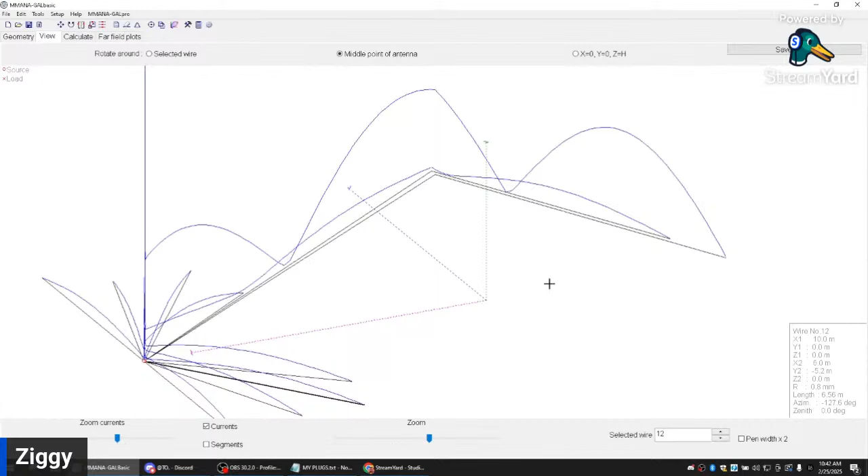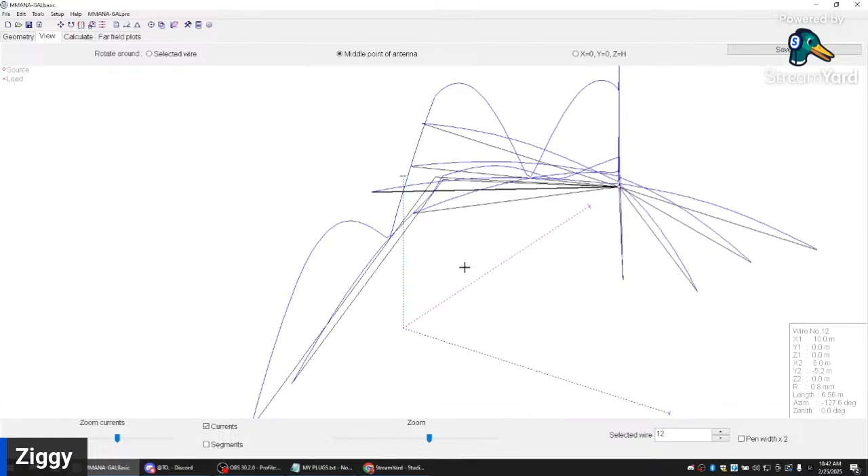This answers all my questions, Hollywood. Yeah, it does. Both of my elements are not only doing work, they're working together, and all my radials, I've added radials. More radials equal better. Indeed, yeah, too much is never enough. Let's see what this looks like in 3D.

Completely changes the antenna. This is by far the best way to learn. Just model it, move the numbers around, see what it does. You've picked up on it fabulously. So this is all good.

This is just a quick check-in on my end, and I got to scoot. I wish I had more time. Maybe we can schedule something in future - I just so happened to turn the computer on and saw you were doing a live stream, and here I am. Here we are, yeah, it's all good. All right man, got to go pick up a computer to fix it. Do it, okay, enjoy the day my friend. You too, adios. Thanks Hollywood. Thanks buddy, bye, see ya.

Awesome, Tio's talking to me. Let's see. What's up Tio, where you at? Tio says that something is either not a concern or it is a concern. My rebuttal to this is two things can be true at once.

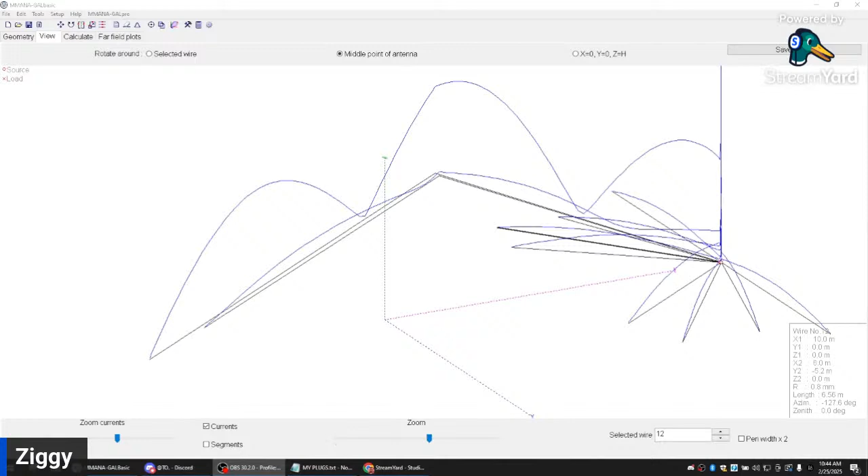That's pretty boring, just staring at that the whole time. I'm sorry guys, Logitech cam. Blah, ugh, look at that ugly mug. So anyway, make sure I'm hanging out with you guys in chat. Failing in software is way more fun than failing in hardware. Well,

I guess I'd have to agree. What you got, Tio? Tio concurs. That's right Hex, you got to break it first.

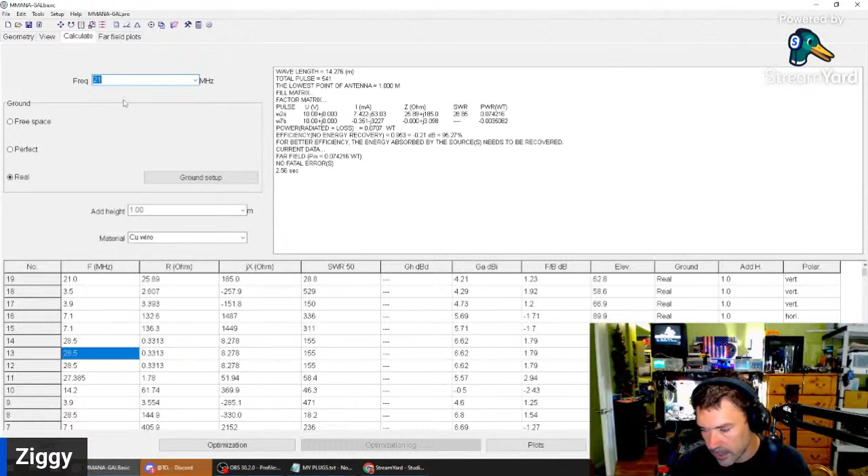What did I model here? This was 21. Where's my cheat sheet? Ham bands. More brightness. So here's a question: what's it going to do on 160 meters? Oh no. It does the thing.

And it does it in a very directional way towards the radials. Where's all the current at? Let's see, high current on all the radials. I don't know. High current at the radial base. It's really upset here at the feed. We do get some current.

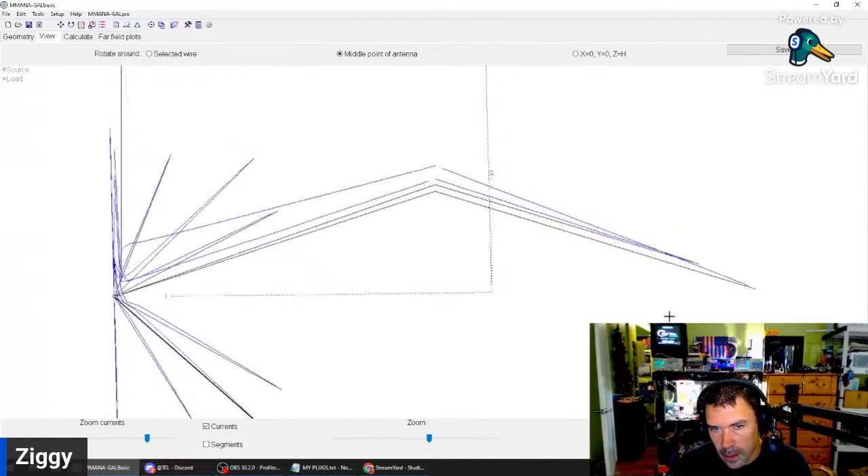It's always going to favor that longer element, it seems, because again, like Hollywood said, it's gonna do the thing down there at the very end. But what we're allowing with this second wire is we're allowing RF to alternatively dissipate - that would be a very lawyer-esque way to say that.

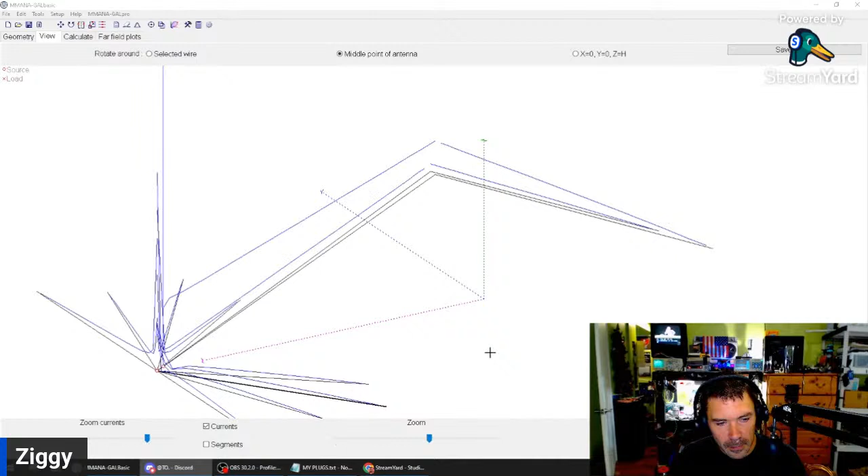All right, but my antenna does not have all these multi-radials. As much as I like them, and as much as they are a bonus, let me, for now, before I try to pull the trigger on a more radial antenna - all right, so I had you, and you, my nudger tool. I want to see what we've done here at, what are we, 5 meters ish? I got to select a wire first.

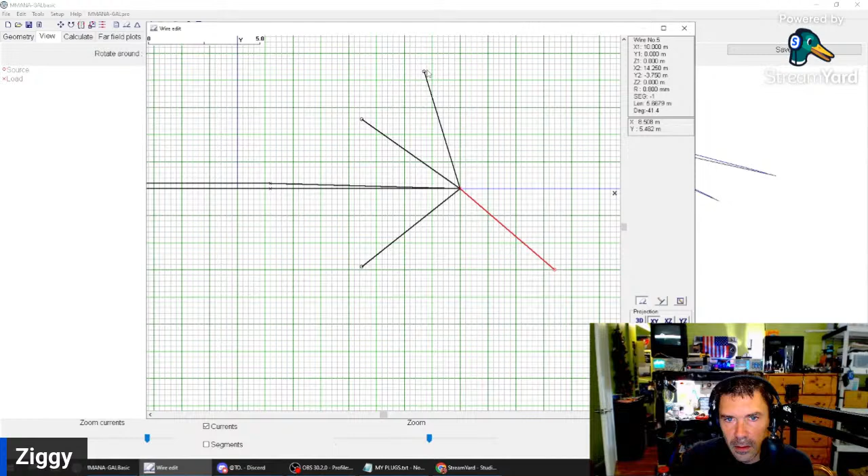5.6. What happens if I move you over here at 5.6? And you, give me this - I got to select it first. You, over here at 5.6. Yeah, do that, because that's the way we all want to impulsively do that, right? What we're at 15 meters. Run it.

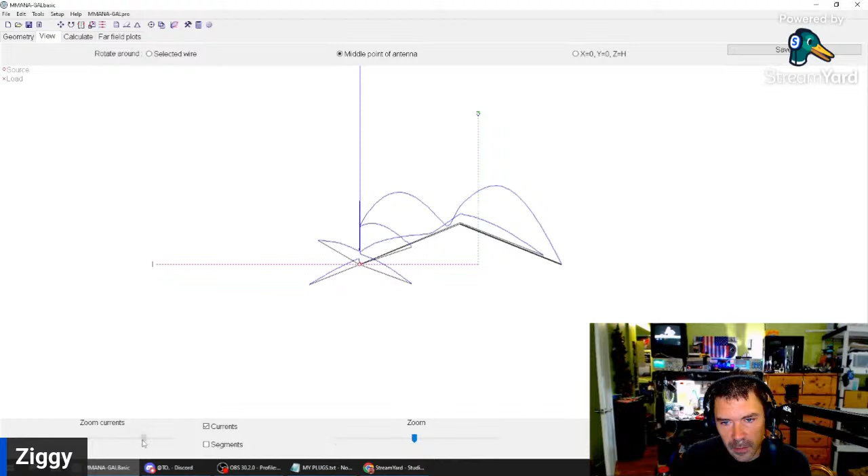All right, so at 20 meters, it cares not about that radial field. I'm sure there's some current there. There's a lot of current there. There's tons of current on that radial field. However, look how much current is on the little wire. I mean, that's nothing to gawk about, because this stray current here that's now radiating would otherwise have to be either absorbed by ground or by the tuner. And both, probably.

All right, this was fun. I've got a - whoa, hey, what are you doing? I got a pretty much great representation of the ZigZag and what the hell it's doing on the air. 18.1 megahertz, it's one of my favorite frequencies.

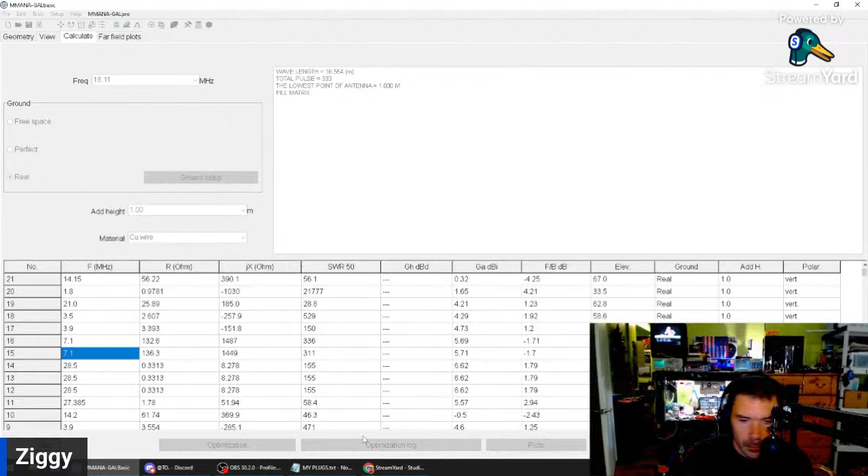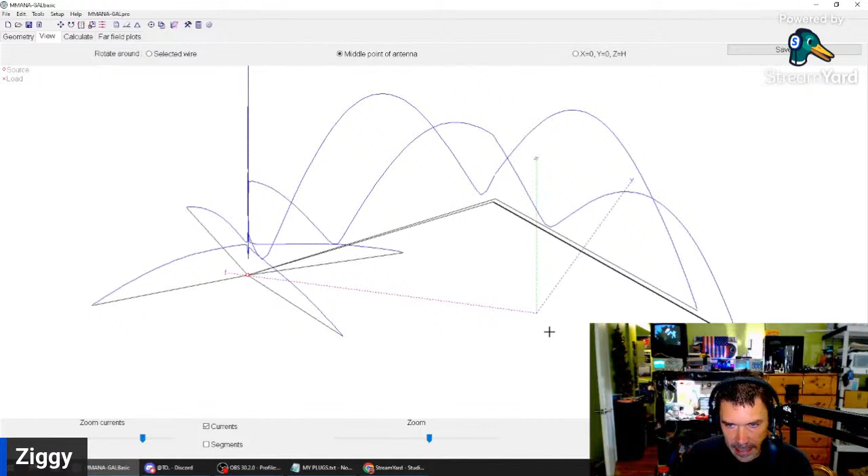Yeah. Beautiful, this is what I needed right here. I needed to see 2 wires dancing, and that's exactly what I've done.

Yes, the RF taco. Absolutely nailed it, Hax. Lots of current on the radial field. Lots of current on both wires. Just about all of this RF - it's going to do the thing.

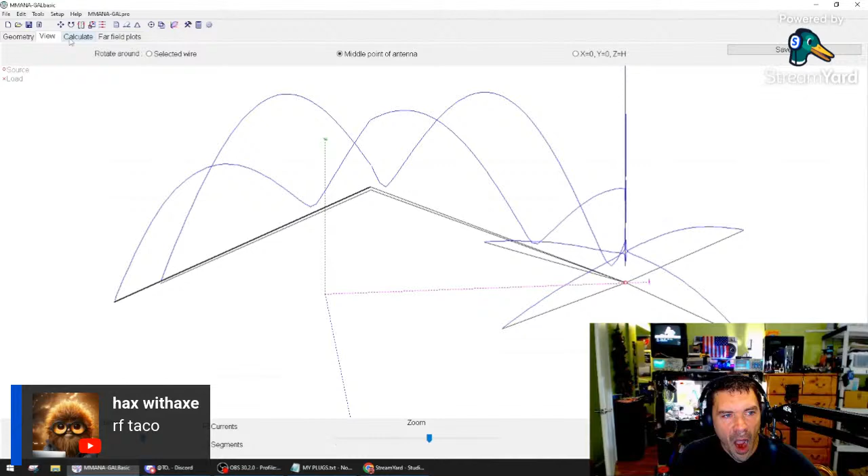21.2. Not bad. Again, where is this? Where is that? Oh look, so this is interesting - so on 15 meters, 21 megahertz, the major gain lobes are actually away from the user for the first time. Okay, so does that change if I change this?

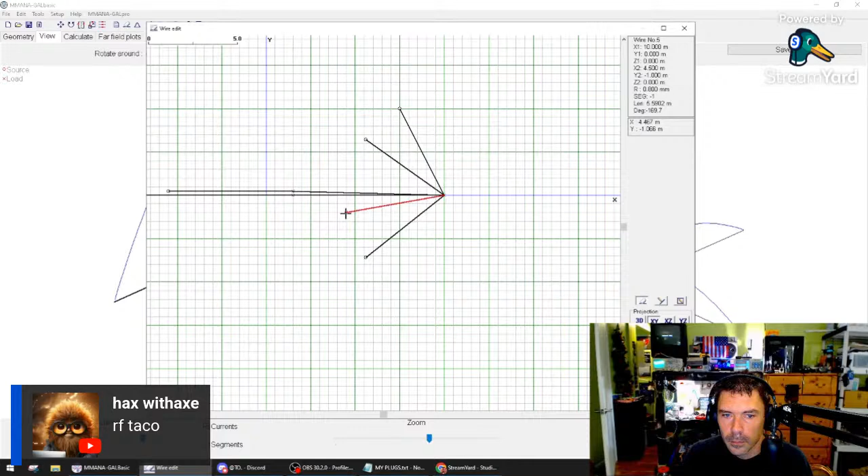Where was that? 15 meters, 21.2. No, no, it cares not. However, things have gone quite wonky. So that radial field is actually pretty important to how it dances, and even the directions that they're strung out in.

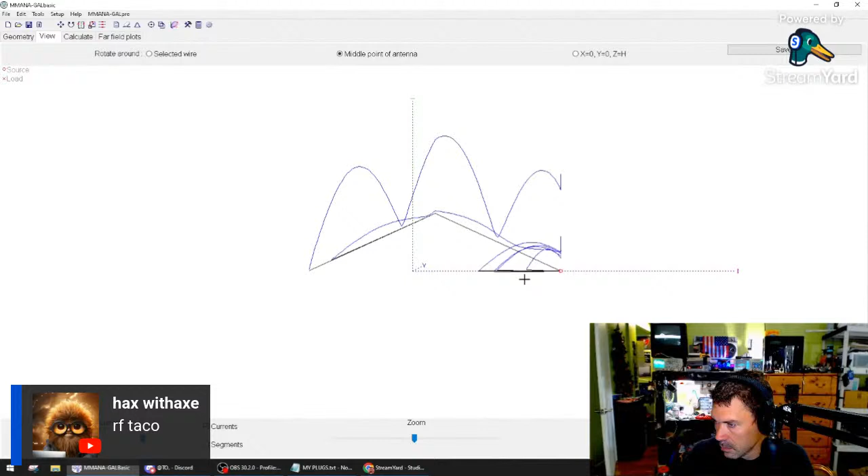Whoa, I'm upside down. We can see that most of my current is now occurring in multiple half waves on my longer wire, not so much on the smaller wire. And we're getting a lot of current off of our radials. So that's great. It's great. It's all great.

Let's do one thing - the ZigZag. Bam, I've saved it. Love you guys.